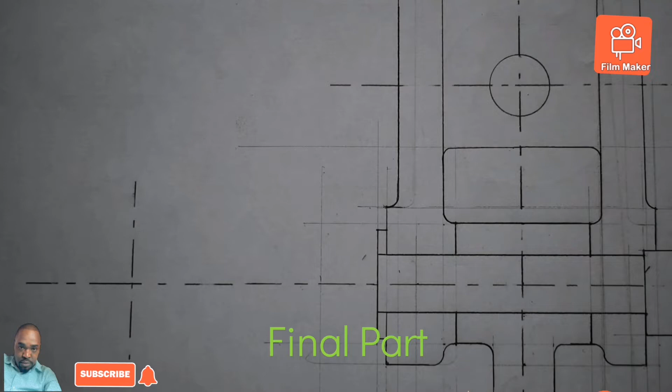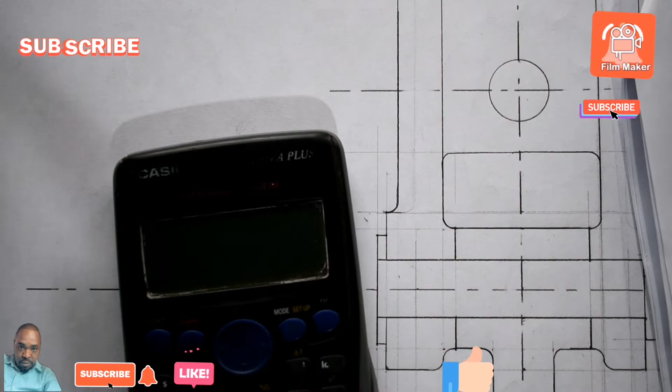Right, where is my equation? So remember that the set is M18. So now, where's my calculator? I'm going to say 1.5 times M number, which is 18, isn't it, equals, and it's giving me 27. So that 27, it should be a diameter. 27 divided by 2 to get a radius.

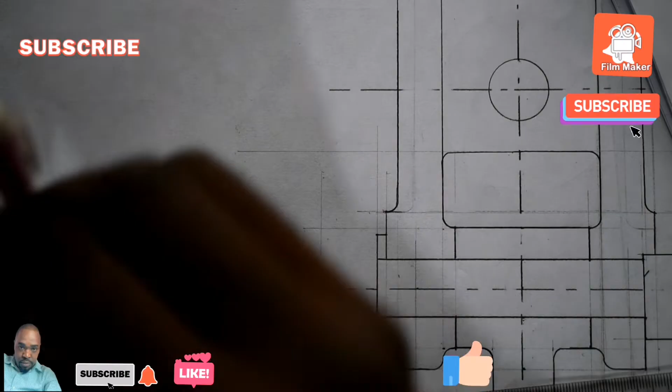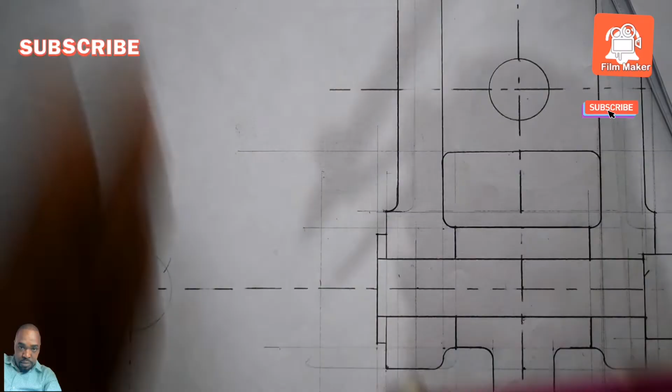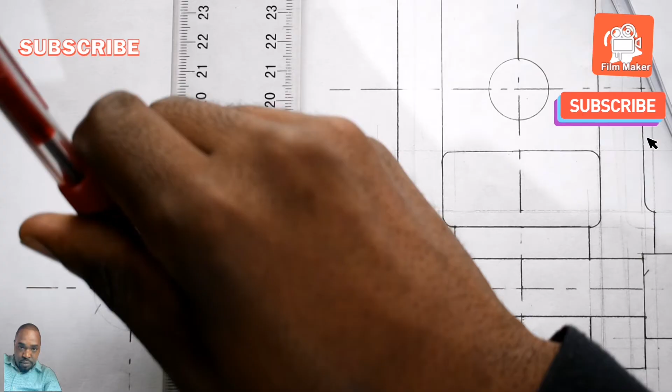So I'm using the vertical center line. Place it here, further extend it to your center, then you strike an arc this side, you also strike an arc this side. So now I'm going to have a dark line from here till here, another one from here till there, understand?

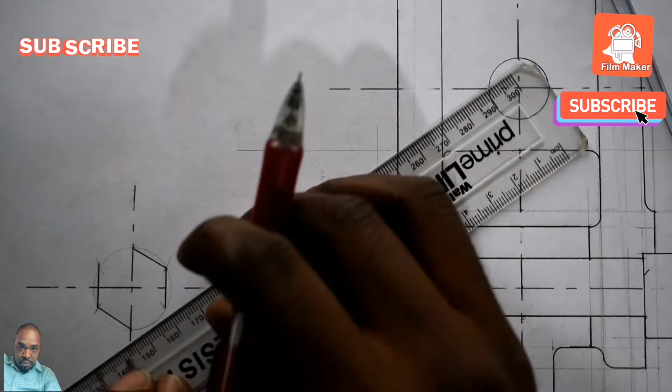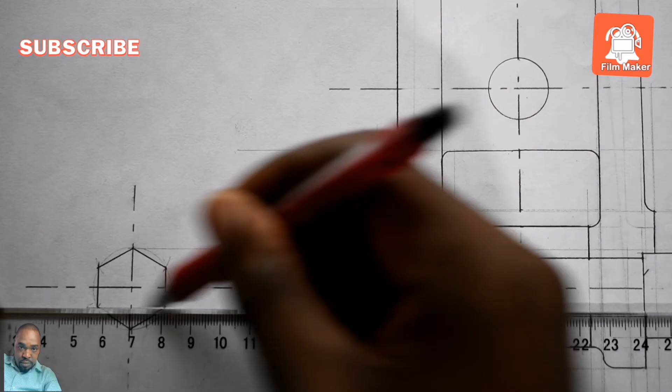Then there you go, and like this will go from here till there, from here till there. That's my hexagonal auxiliary. So now I'm going to project this point in this direction, this point, this other one, even this one.

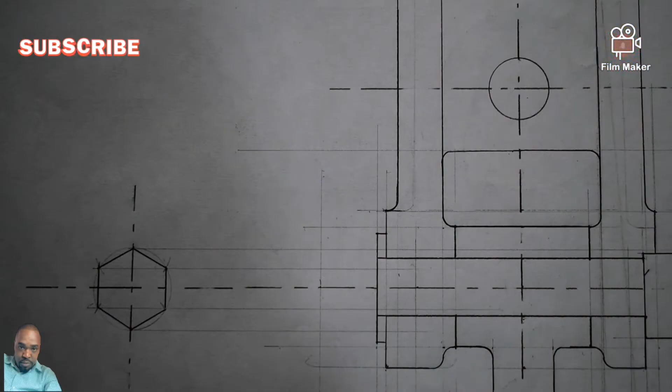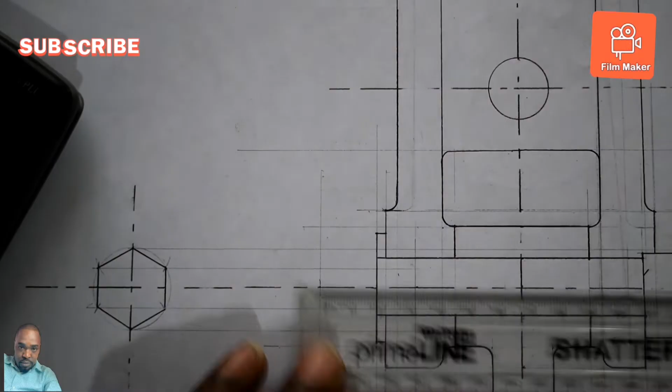So remember, this is the length of our shaft. It started from here till right there. So now from here going this direction, I must get my nut, and the height of the nut, you remember from grade 11, is 0.8 times M number, which is 18. So it's 14.4, which means it's 14 millimeter. Understand?

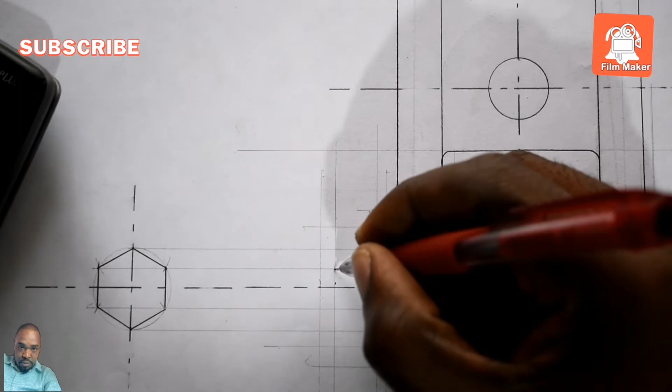So this is 15, this is 14. So I mark here at 0. That's going to be the height of my nut. So I have a point here, another one here, another one here, and another one here. So from here till here is this one. So I've got a point here, a point there, a point here, a point there. So now I can join these points.

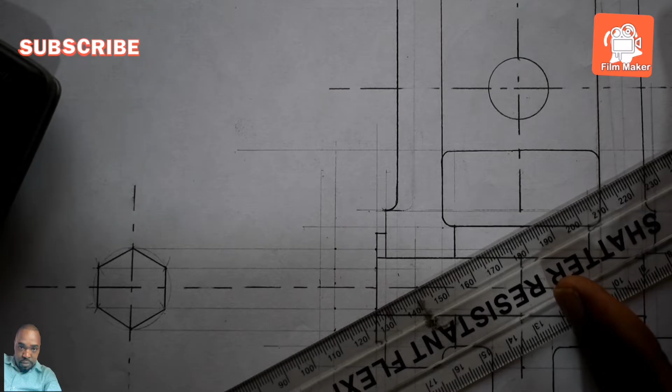Somebody in my comment once said, we don't join points from nowhere. My brother, I am not joining points from nowhere, you understand?

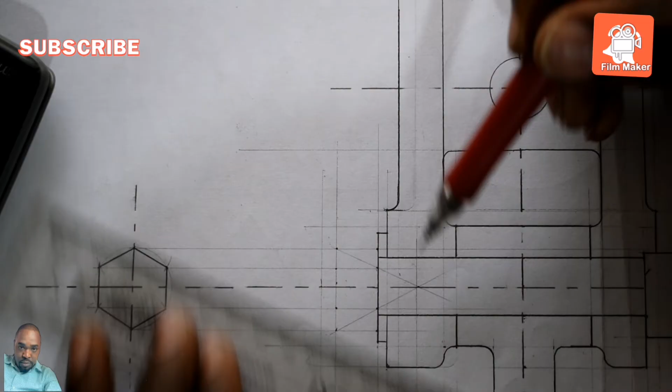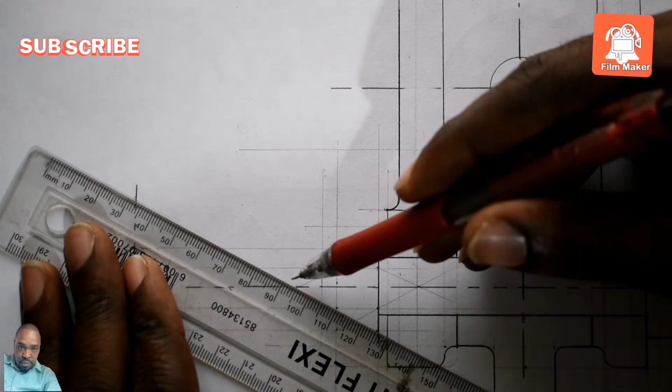So I'll further extend. Once it crosses the horizontal center line, I can stop. Even this other side, see that we're on the right track. These two lines are actually meeting at our center, that's how it's supposed to be. So this other side, do the same thing. Once it crosses this horizontal line, I stop. Corner to corner, there you go.

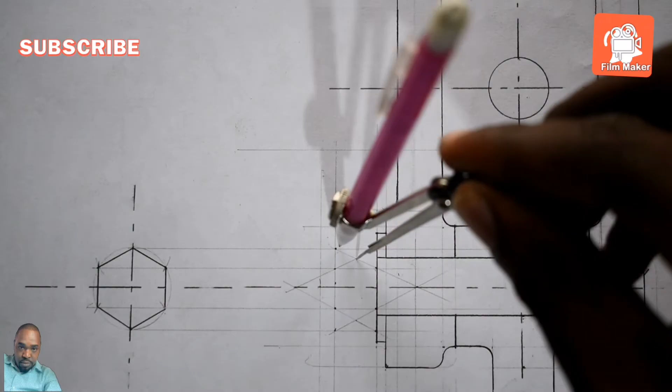So now take your drawing compass. I'm going to place it here to get an arc this side, and an arc this side. Place it here, get an arc this side, get an arc this side. So here we go. Let me try to zoom it just a little bit so that you see it clearly.

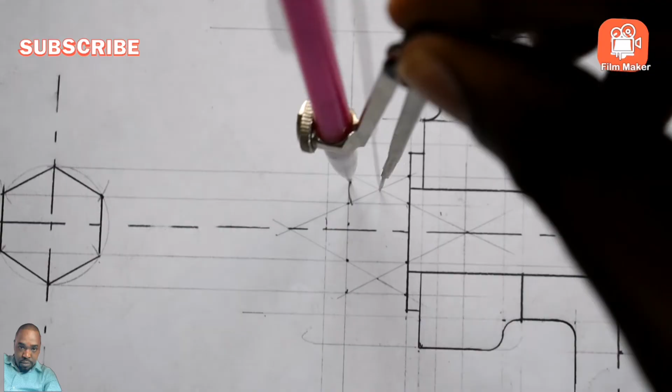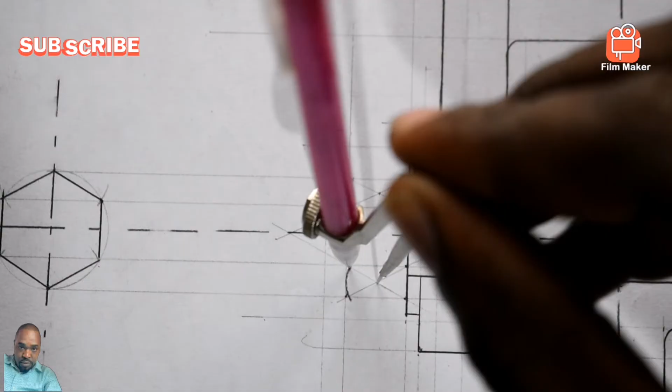So now I place it here, and draw dark. There you go. Even this other side, even though it won't be clear, remember a nut is supposed to be on both sides, you understand? So now place it here. There you go. A nut is supposed to be on both sides.

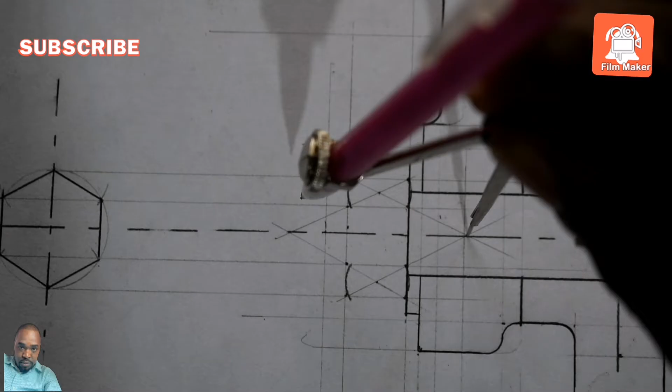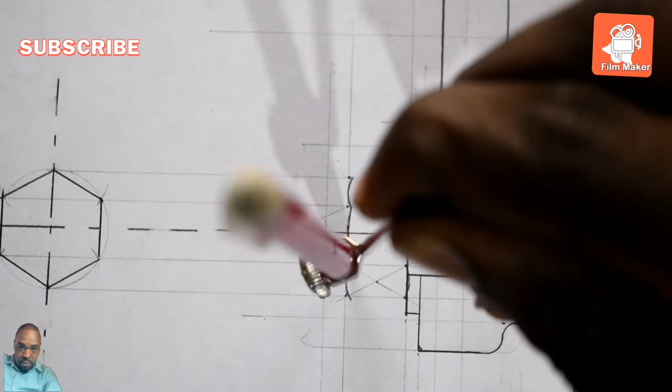So now to close it, I'm going to place it here, where these are crossing each other along my horizontal center line. That's where you're supposed to place the drawing compass. You further extend it up to this point. So now I can draw. This other side, I'm going to place it right there, further extend till there. Do the same thing.

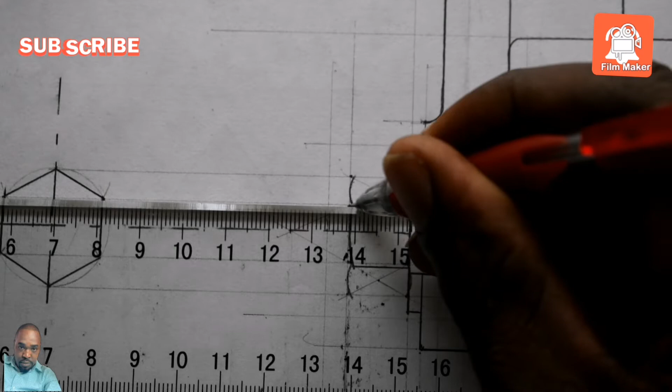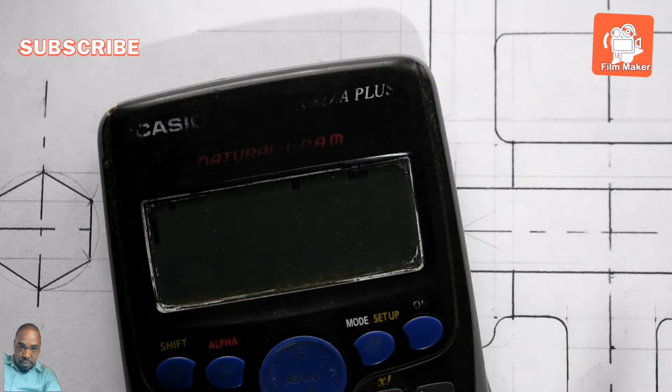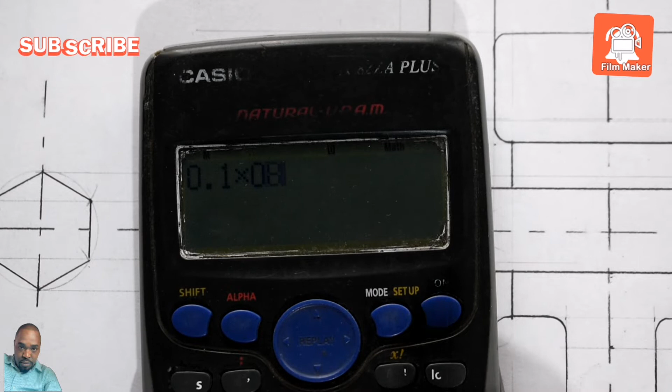So now I can come and have this one solid, this other one solid. Actually, you're supposed to use angle 60. Then you come, have this one. So we've drawn our nut. Now we are going to expose the thread. The thread is 0.1, if I'm not mistaken, times the M number, which is 18. So it's 1.8, which means it's going to be 2 millimeter.

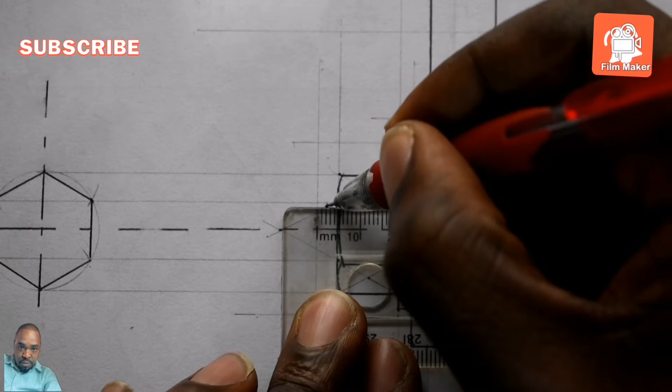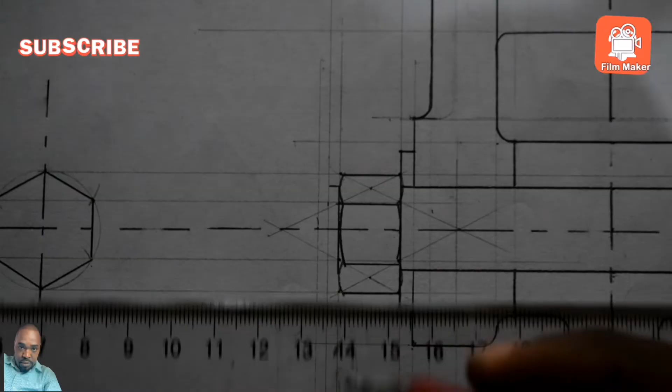So from where the length of my shaft, the 108 millimeter, ends, I'm going to go back 2 millimeter. This is 0, 1, 2. So there is my 2 millimeter ending. So I construct a line like this, and this is my shaft. It will be from here till here, inside the nut. Then this other side from here till here inside, but from here it will be seen clearly.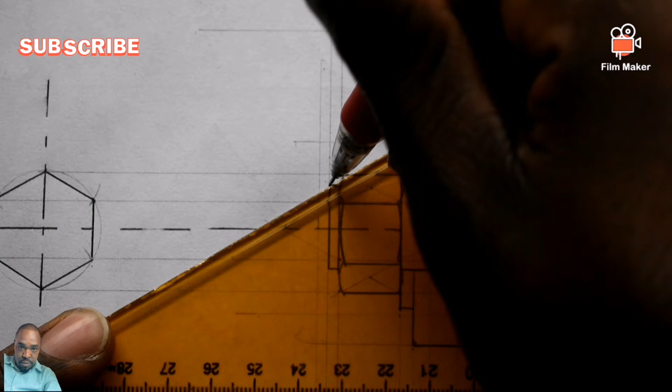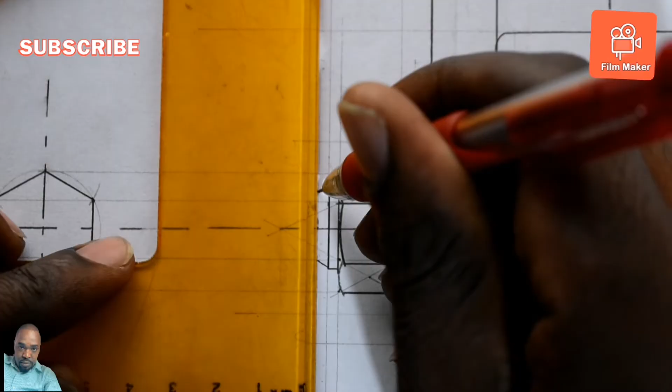Then we use angle 45 this other side. No, I'm lying, it's not 45. Angle 30. There you go. And there we go. Then you go back till here, go back till here. So let me see the length of our thread.

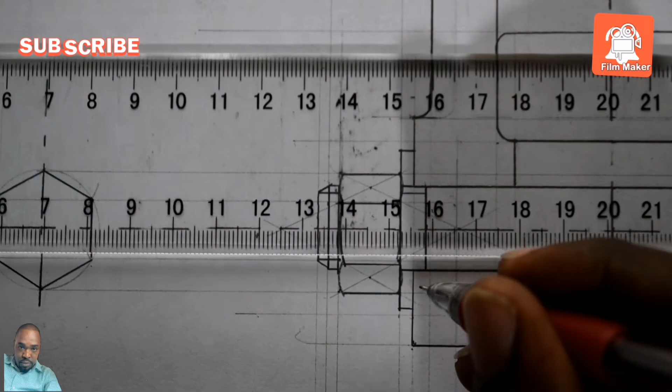So from here going back, the length of our thread is 25 millimeter. So this is going to be from here till right here, my 25 millimeter. So I can even have it dark. That's where my 25 millimeter ends. Then they will be exposed here. But there is a missing dimension, because I'm not convinced this distance has to be the same as this one. Alright, then we use angle 60 now.

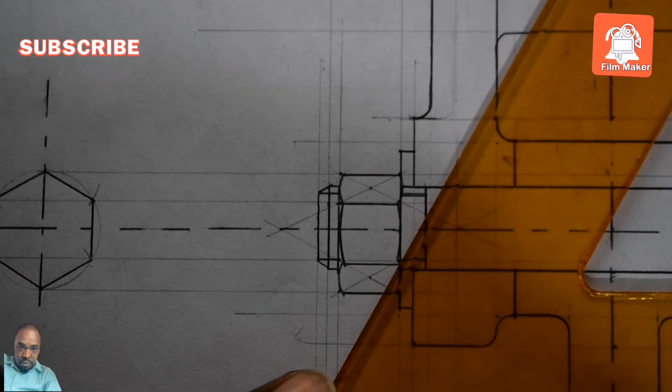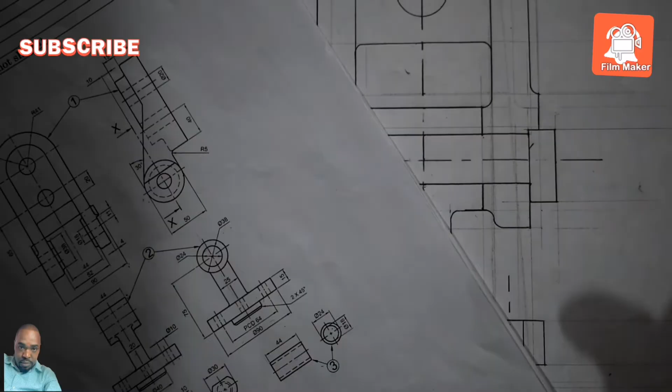So like this, we are now done, ladies and gentlemen. Item, we are done. Then we have to section. Item 1 is this one. This is item 1, isn't it? Item 1. Then item 2. This is item 2. You understand?

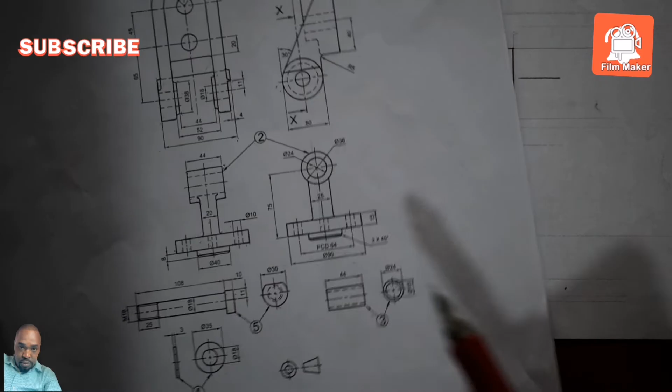So item 3, which is the what? Which is the bush. Item 3. Where is my item 3? So we ended up just assuming we have to draw it. How? We said item 3 is going to be fitted in item 2, isn't it? So the outside diameter of item 3 is what? Is 24. So I'm going to say 24 divided by 2.

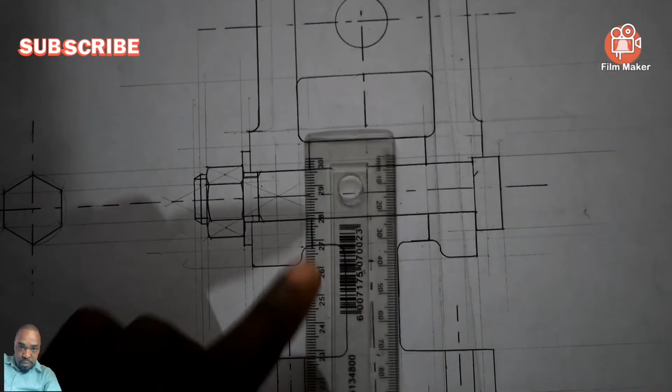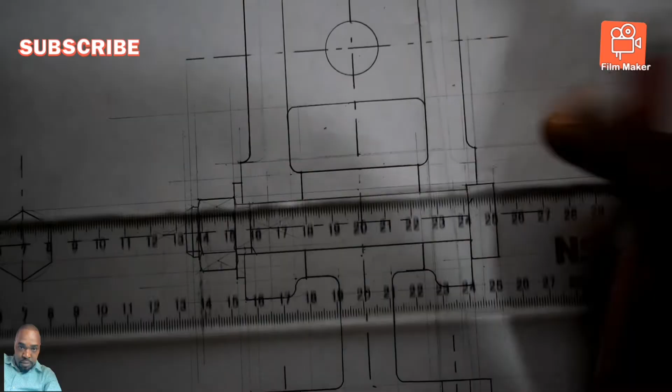So it's actually inside there. So 24 divided by 2, we are getting how much? 12. So just come here. This is 10, 11, 12. So I mark here, and 24 I mark right here. You understand? So the moment I'm just getting this line dark from here to right there, and from here to right there, I assume my item 3 fitted there already. You understand? So there is our item 3.

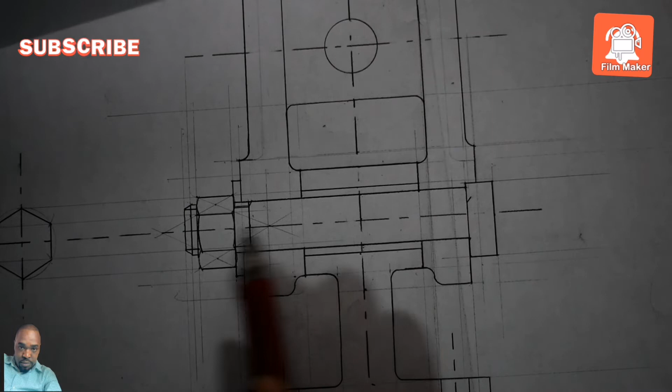So item 4, which is the washer, is that one. Item 5, which is the shaft or the bolt, is that one. So item 6, which is the last one, the nut, is that one. So then we have to section. So now you see the cutting plane of XX. Let's see clearly, because actually we were supposed to draw the right view of item 1, so that to get that point.

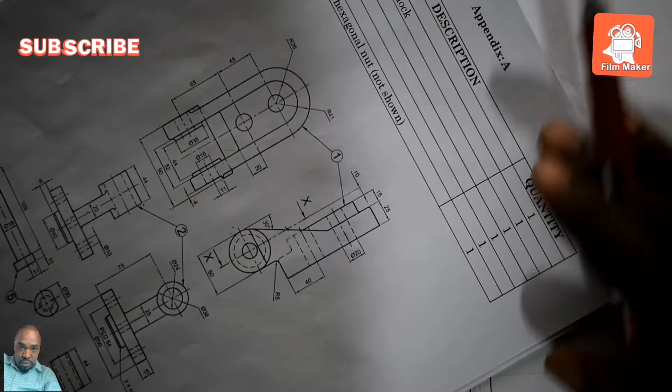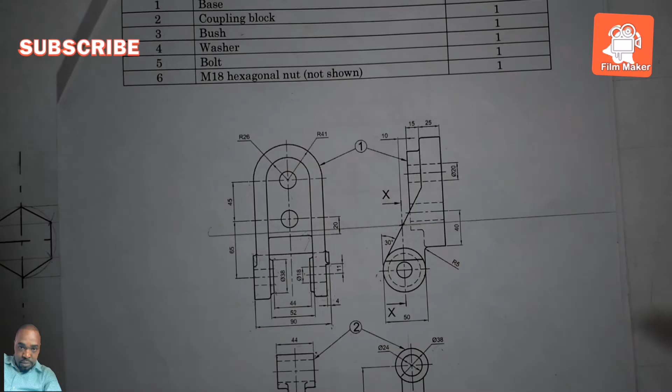We are not given any dimension, but we know it is actually lying at that vertical center. But now let's see, is it corresponding with this one? How are we going to see that? So it's not. It will be just a little bit, because once you get it like this, that's where your hatches will start. So just a little bit up, that's where your hatches will start. So the upper part of your item 1 is going to remain as an outside front view, because this part was before the cutting plane.

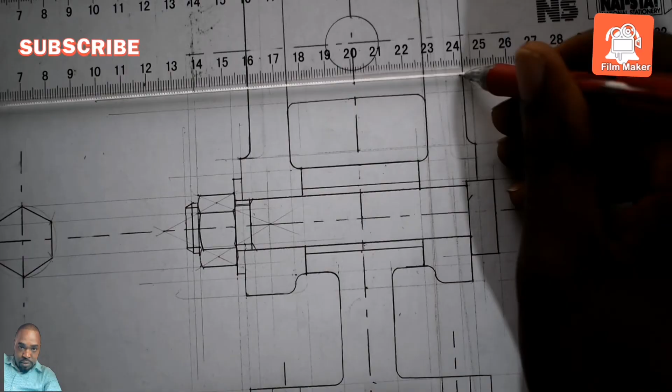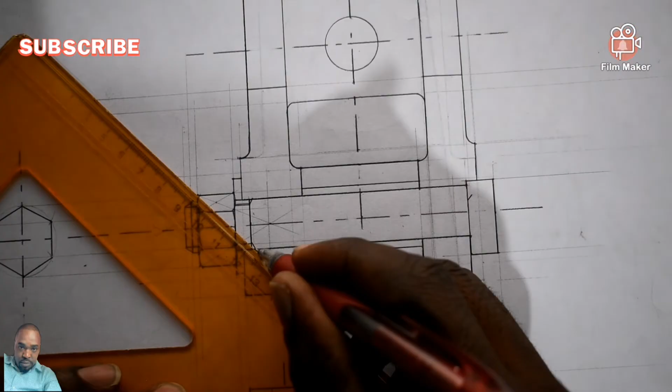So I will assume it's in the middle of this point and this one. Actually, you don't have to assume. We're supposed to draw the right view of item 1, so that we get to that point. So from this point going down, everything's supposed to be in section. Okay? So now let me section. So decide to use this angle. There you go. This is item 1. I'm sectioning item 1.

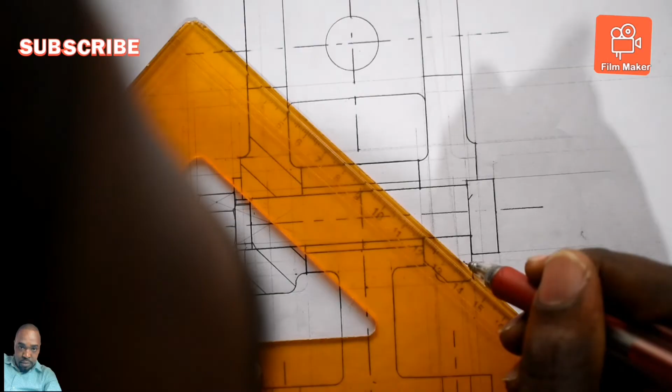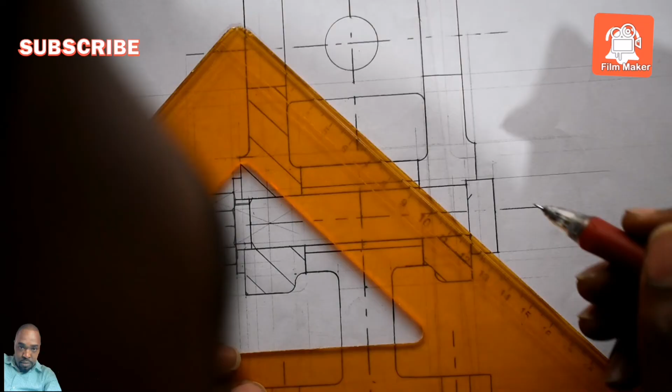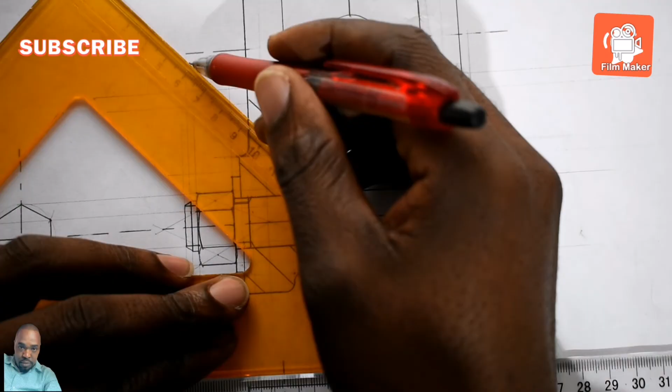So it's coming there, it's coming here. There you go. It's already coming that side. It's coming here. There it goes. So I can label like this and say diameter 8. This is item 1. So that's how we have to do it.

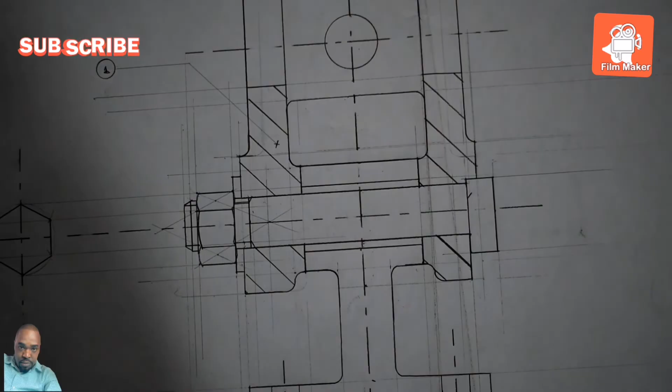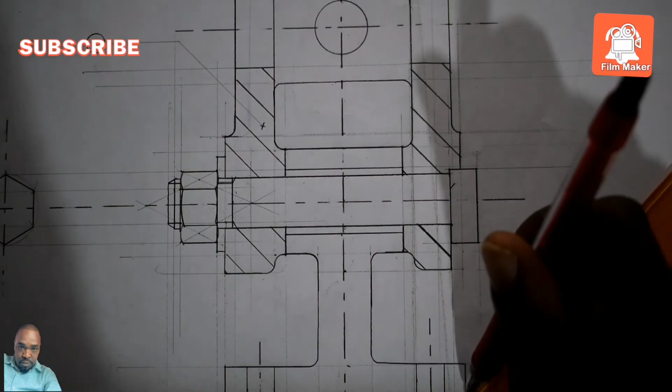You understand? So now I'm going to item 2. Item 2, where are you? Item 2 is this one. So which means the hatches of item 1 were in a clockwise direction. So the hatches of item 2 must differ, and they must be a little bit smaller than the one of item 1.

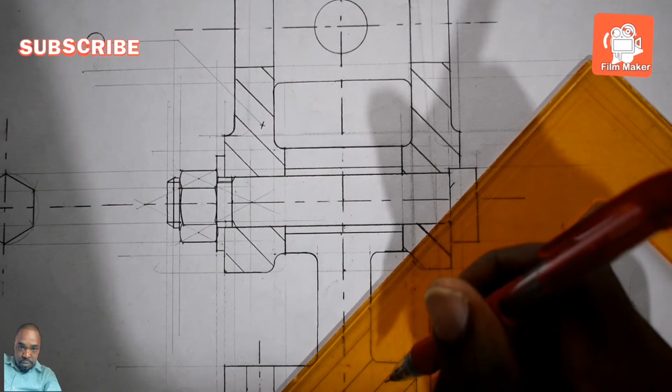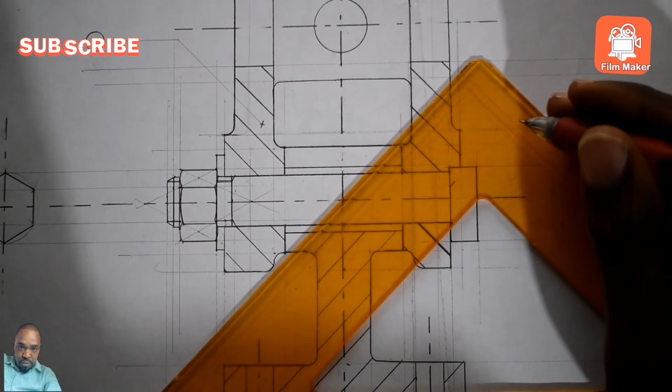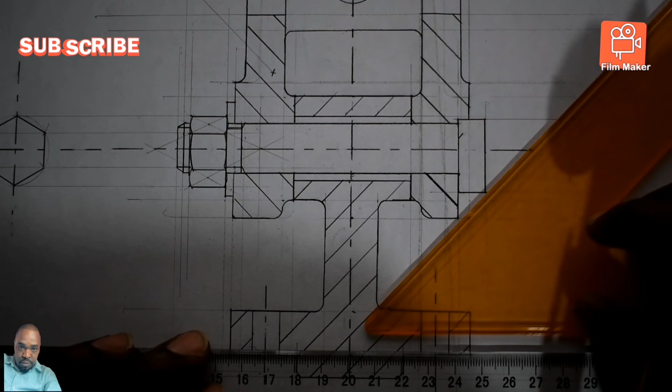There you go. This is item 2. Remember, up there is still item 2. That's our item 2. So then label item 2. You can decide to label it this other side. I mark diameter 8. There, this is item 2.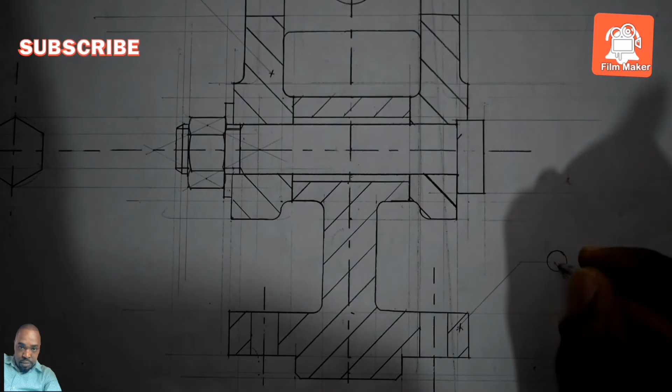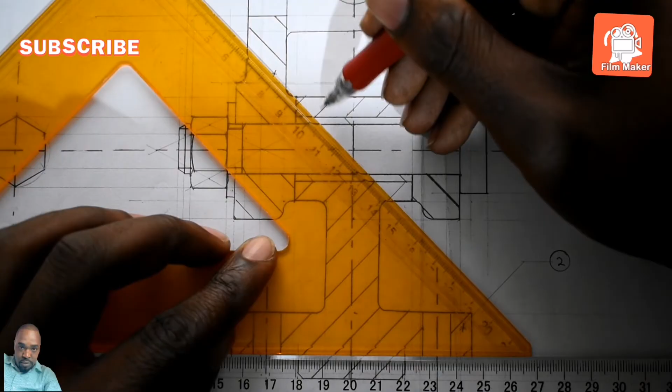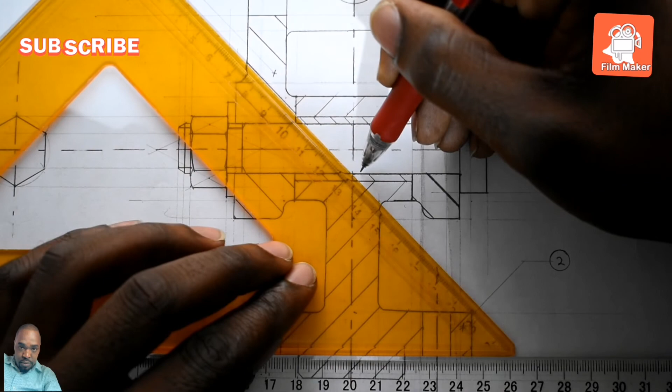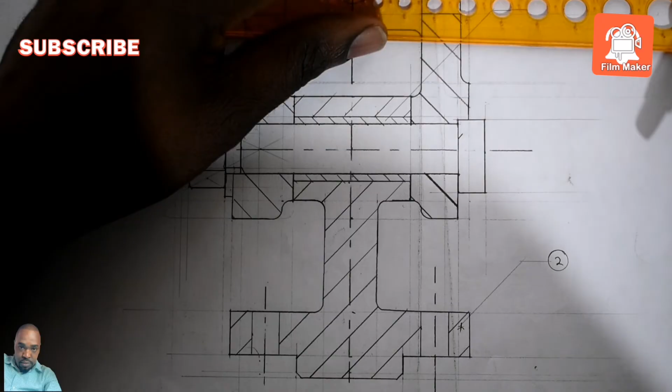Then item 3, which is the bush, which is this one. Call it spaced. So now label it. You can decide to label this other side. This is my item 3.

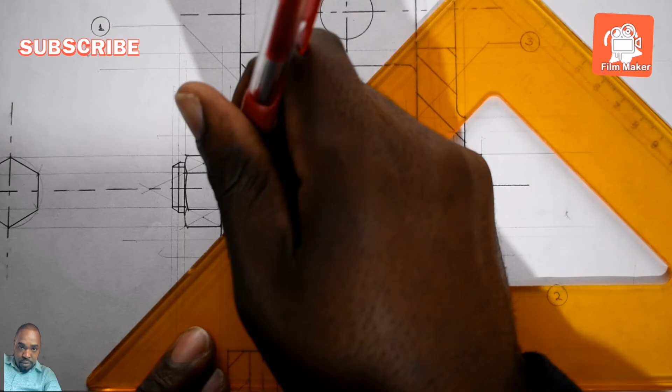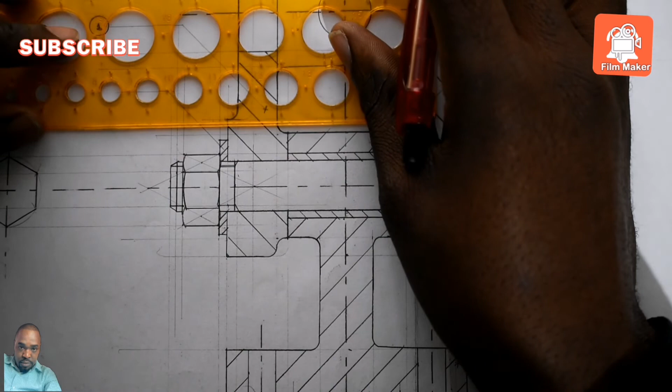Then item 4. Item 4 is this, the washer. Remember that item 3 was anti-clockwise, so item 4 must be clockwise. And it's very small, so the hatches must be small as well. So I can decide to label it this side. So this is item 4. Right. Then item 5, which is the shaft.

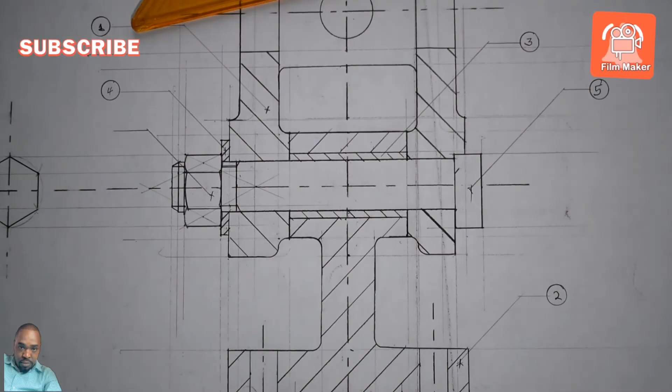Item 5. Item 6, the last one. So that was it. So remember, you are done. So you have to print this. You can print this one right here: the part list, the name of the drawing, and the scale, which is 1:1. So after that you are done.

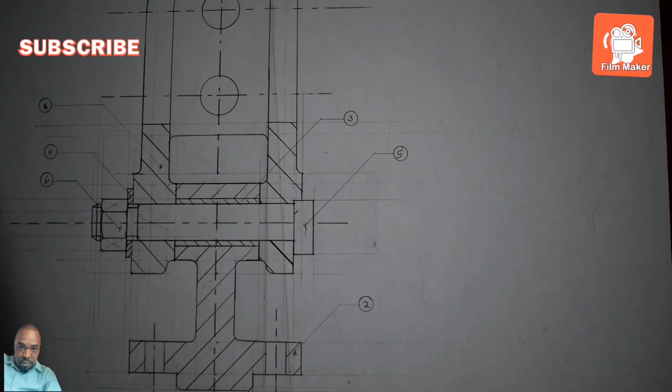So that was an assembled drawing.